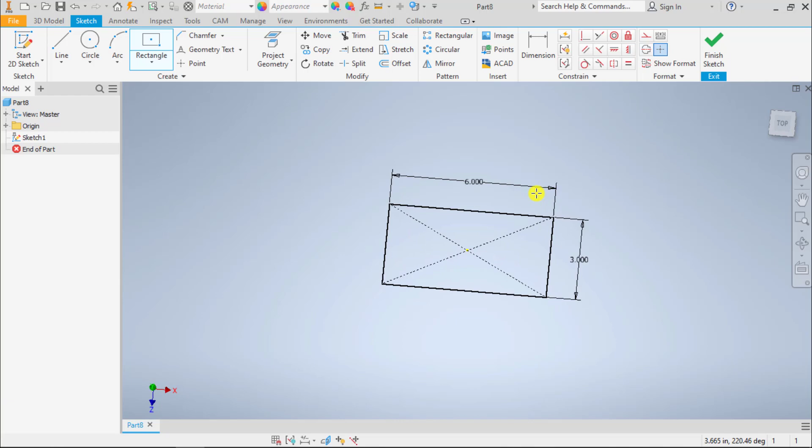So what I'm going to do is get started with a 2-point center rectangle for a solid base. Let's make it 6 by 3 and we'll shoot it to a thickness of 1 inch. Okay, so specifications came out for this project and we have to put a hole into it. A hole is a round lack of material.

So we're going to go ahead and sketch on here, and we are going to put a projected geometry, and then we're going to put a point on here and one on the other side. We're going to make a symmetric constraint between those two and my middle plane. This is why it's important, why I keep preaching, if it's symmetric, make it symmetric.

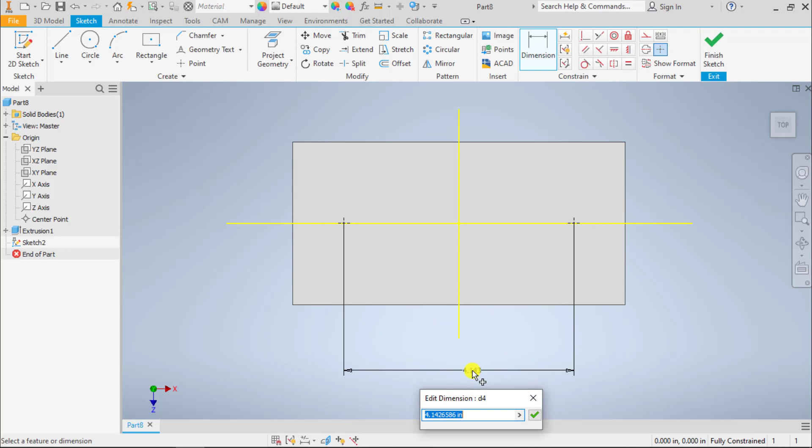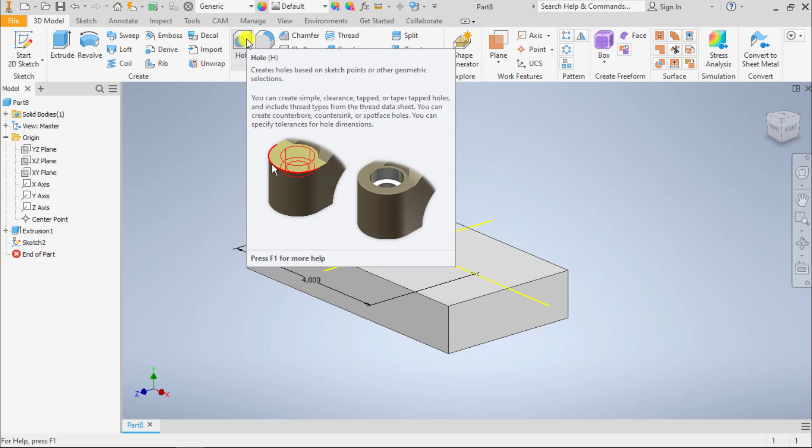Okay, so let's do a spacing center to center of 4 inches on those two. That's it. That's all we need. Now we're going to click the hole feature. Now this is what we call a placed feature. Okay, so let's imagine for a second that I did not create this sketch. I could still use the hole feature without the sketch. Okay, so we're going to start off though using my sketch.

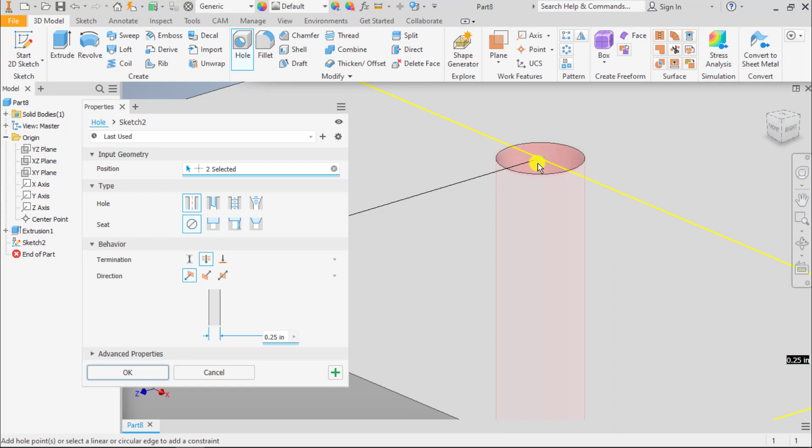So hole, it automatically selected my 2 center points because it knows what it's looking for. So if we start working with our dialog box top to bottom, position 2 selected, it automatically picked those 2. Now if I didn't want one, I can hold the control button and then pick that center point and unselect it. But I want that one, so we're going to go ahead and reselect it. Now notice that my holes are the same size.

So starting top to bottom, we're going to go through our options here. So we've got hole with a simple hole. We've got a clearance hole. And a clearance hole is a hole that is going to provide clearance for a specific sized bolt or machine screw. So if we select that, we get some fastener options here in our dialog box of what size screw do we have. So let's say we have a hex head bolt and that's a 1/4-20.

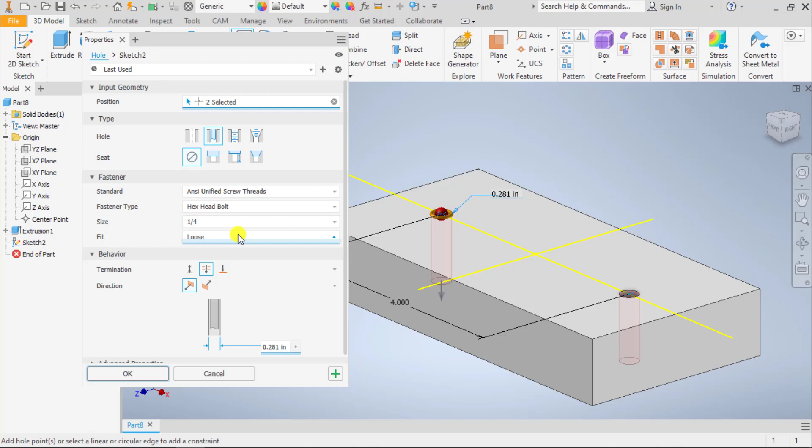It's going to tell me that for a 1/4-20 to have a normal fit, I need a 0.266 inch diameter hole. And then I can go to a close fit or I could go to a loose fit, and it will change those based off of my selection. So all I have to know is the type of bolt that's going to go through, and that will take care of it for me.

Now I can say I want a tapped hole, and that fastener is going to stay the same, except what's going to happen is it's going to size it for a tapped hole. So what size hole would that need to be for, let's say we have a 1/4 inch, 1/4-20, and then it's going to size everything for me.

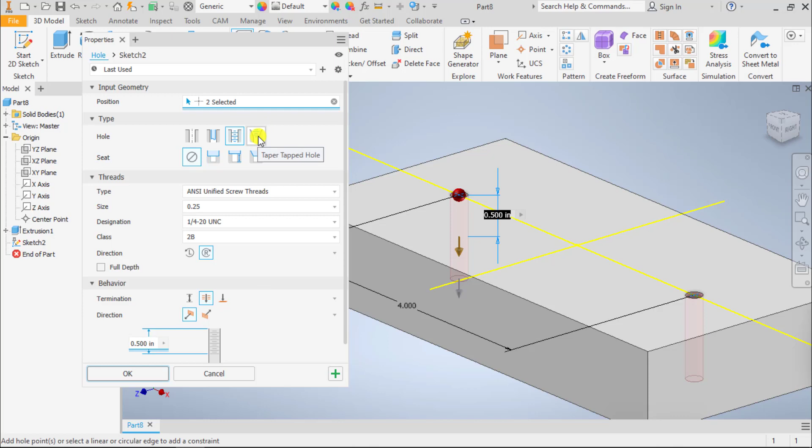And then a taper tapped hole is the same as a tapped hole. It's just going to add a taper to it. So that's going to give me some other options for different types of fittings that I'm going to use. So let's go back to a simple hole. And now let's talk about seats. This is why you never, ever want to just draw a circle and extrude it as a cut to make it a hole.

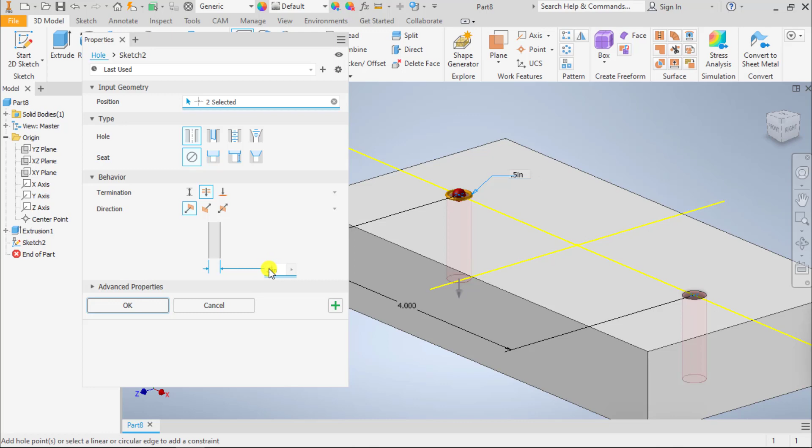So let's just hit OK real quick here. You know what? Let's change our diameter. Let's make this a 0.5 inch diameter hole. Now you're saying, well, okay, that's great. But I can also come in here, draw a circle, 0.5 inch diameter, and extrude that as a cut. Boom, done. What's the difference? Right now there is no difference. But what could the difference be? Well, let's look at it.

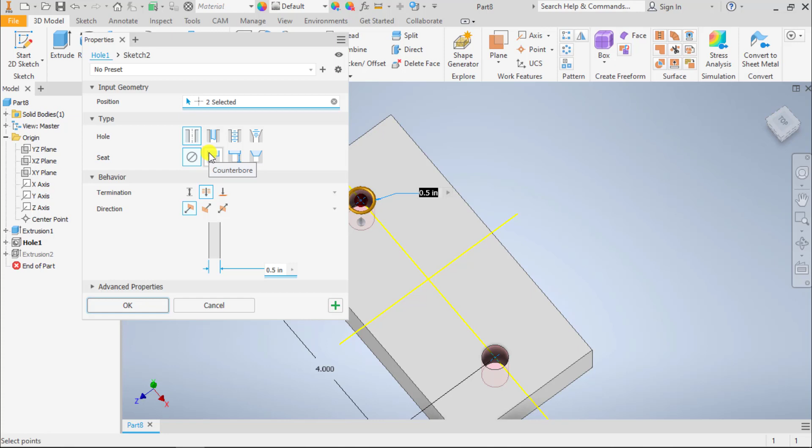So if I double click my hole to edit it, and I look at my seat options, this is where the difference comes in. Counterbore. So this is used for, say, a round head machine screw that you want to sit recessed down in so that the top is flush and you don't have interference with your bolt head. Here's a spot face, and here's a countersink. Those are used with countersink screws.

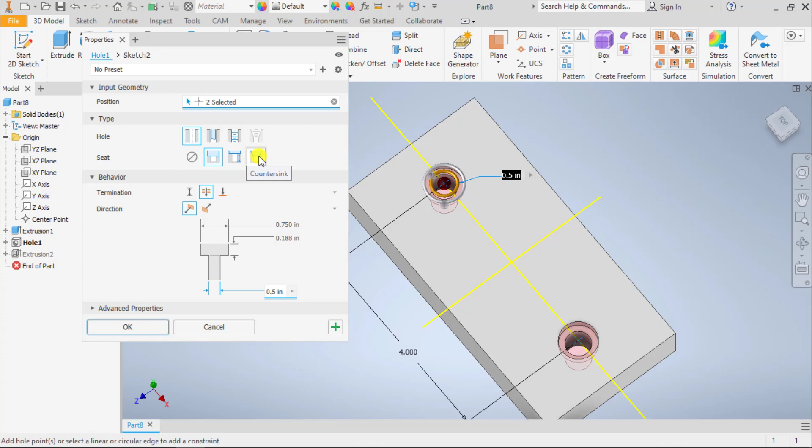You cannot turn this extruded circular cut into this countersink at all. It doesn't work. So I know you're thinking, well, if it's just round and I know it's not going to change, then why should I make it a hole? Because it's good practice. It gets you into that habit.

Customer calls up and says, oh, you know what? I need that hole to be a counterbore. And you say, okay, boom, done. Counterbore, done. Get it off to the shop, they can machine it. Or you send them a new print so that they can approve it. Whatever the case is. So we want to make sure that if it is a round hole, it needs to be a hole feature.

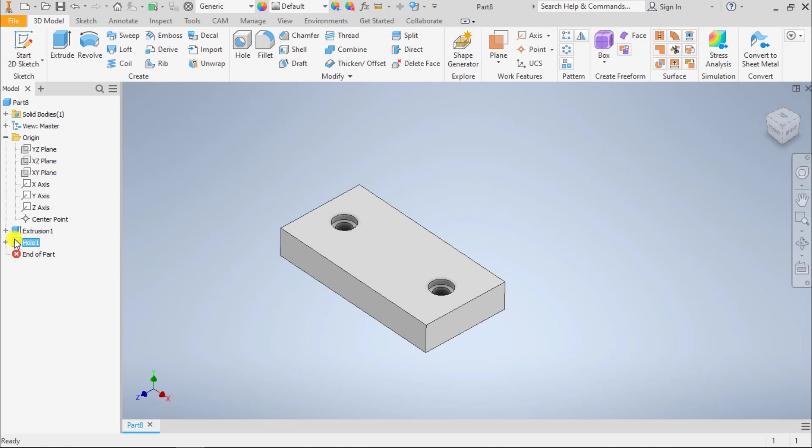Okay? So coming back in here, for our counterbore, we've got different options as far as our counterbore diameter, our counterbore depth, and then our diameter of our through hole. And then on a countersink, we've got the angle and the top diameter, and then the clearance diameter through here. Now these can also be tapped.

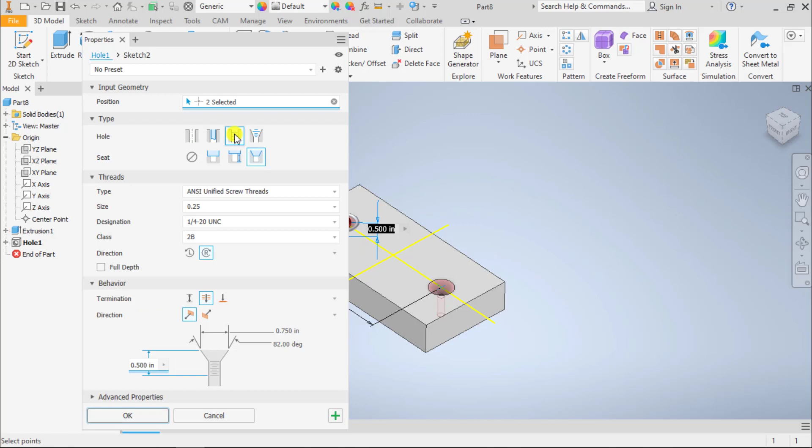So let's say that I wanted to do a countersink for a flathead machine screw, and that's going to be a 1/4 inch. That will give me all of my numbers that I need, so that all I have to do is click OK, and now I know that everything will fit when this part has been fabricated. That's going to do it for hole.